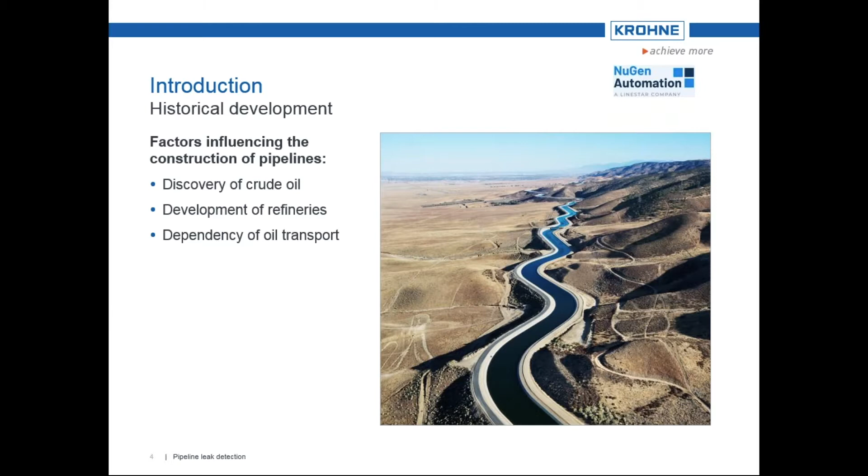Today's pipelines originated in the second half of the 19th century. While drilling for water, crude oil was accidentally discovered in underground reservoirs. This crude oil was not very popular until simple refineries came into existence. The oil was transported to these refineries in wooden vats that were originally transported across rivers via barges, even pulled by horses. One alternative method of transport was by way of railway tanker cars.

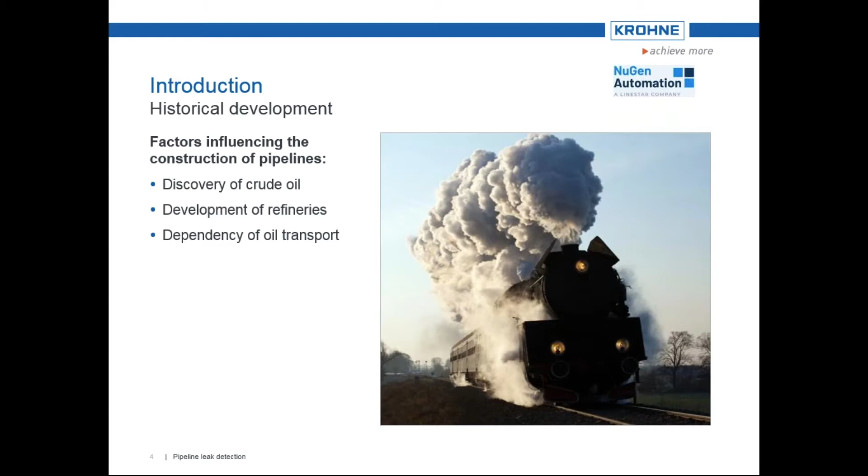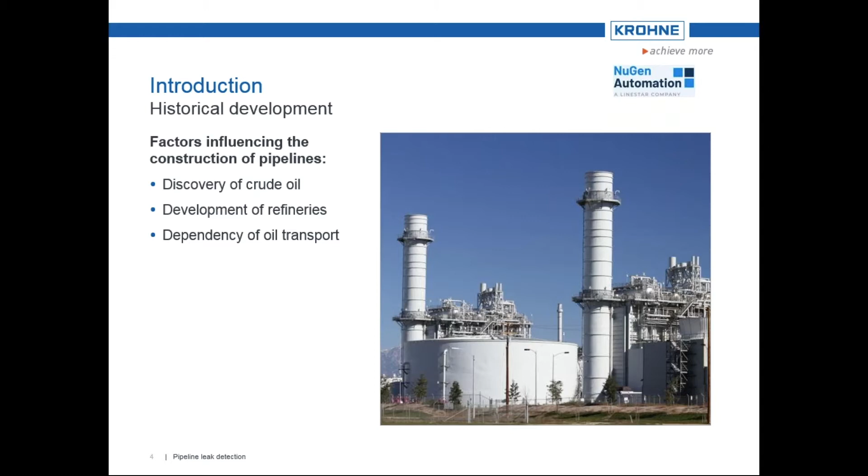However, this meant that the oil was controlled by the railway owners. These were very large monopolies at the time. So to make transport independent and more reasonably priced, pipelines were adopted as a more economical means of transportation. The transported oil was then boiled off in refineries to obtain the byproducts of naphtha, petroleum, heavy crude oil, coal tar, and benzene. The petroleum was used as fuel for lighting and was very popular, and the benzene produced at that time was initially considered an unwanted byproduct and was disposed of.

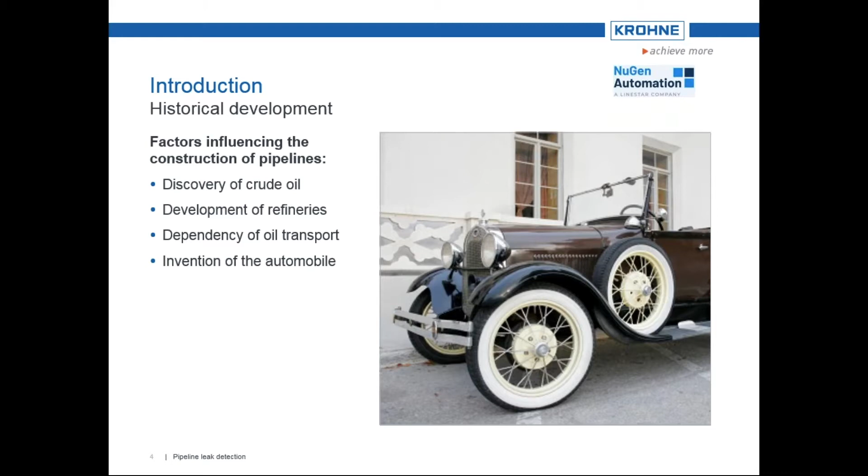This situation changed drastically with the invention of the automobile, which drastically increased the use of gasoline or benzene. Pipelines today transport a wide variety of materials, including oils, crude oils, refined products, natural gases, condensates, processed gases, as well as fresh, produced, and salt waters. Today, there's some 1.2 million miles of transport pipelines around the world, some well over 1,000 miles in length. The total length of all these pipelines lined up end to end would circle the Earth 50 times over.

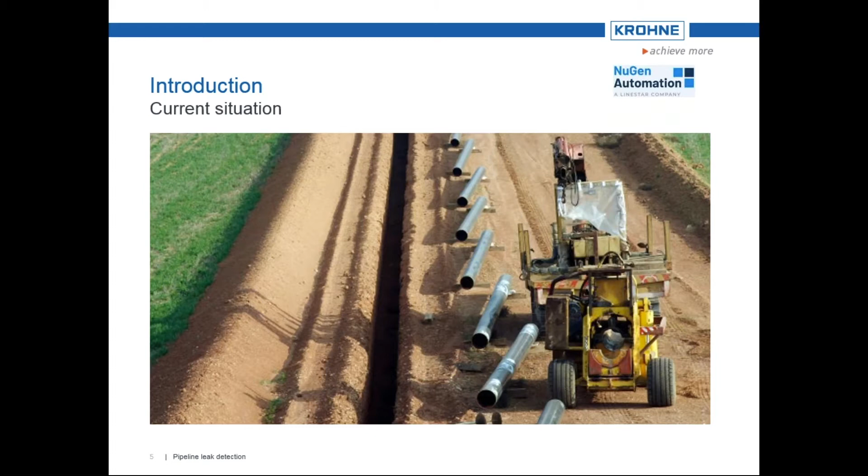The construction of longer pipelines with larger diameters also increases the need for more intelligent leak detection systems to better detect and localize any unwanted releases. Whereas it was once enough to have inspectors walk the length of pipelines and visually look for leaks, today this is no longer possible. In many cases, due to the longer lengths and rigorous runs of remotely located pipelines, physical access may be limited. Pipelines can run through snowy landscapes, across mountain ranges, along bodies of water, or even be located underground at depths of up to or exceeding 1 mile.

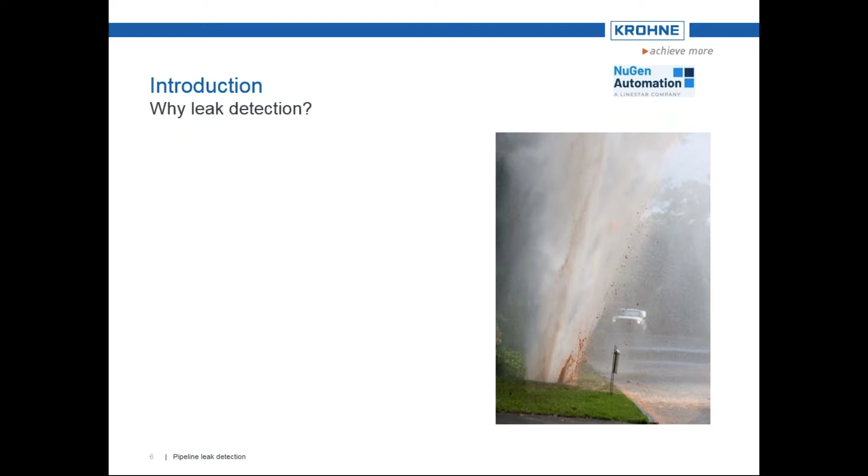But why is it necessary to implement leak detection systems at all? Although pipelines are the most reliable and safe option compared to other methods of transportation, accidents and thefts can and do occur with pipelines. In such cases, leak detection systems can help minimize the damage to people, to the environment, and the company image, which is significant these days, as well as the high cost for repair, renovation, indemnity, breakdowns, and of course the lost value of the liquid or gas that has been released. And again, in most cases that's least significant in the case of an accidental leak.

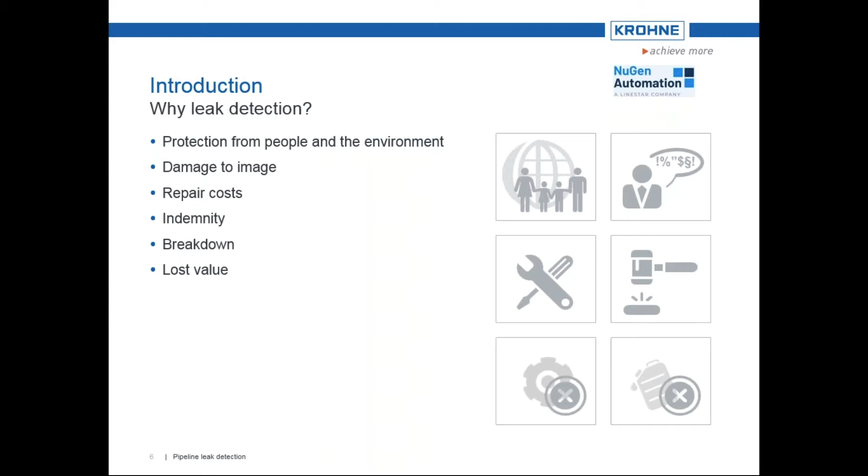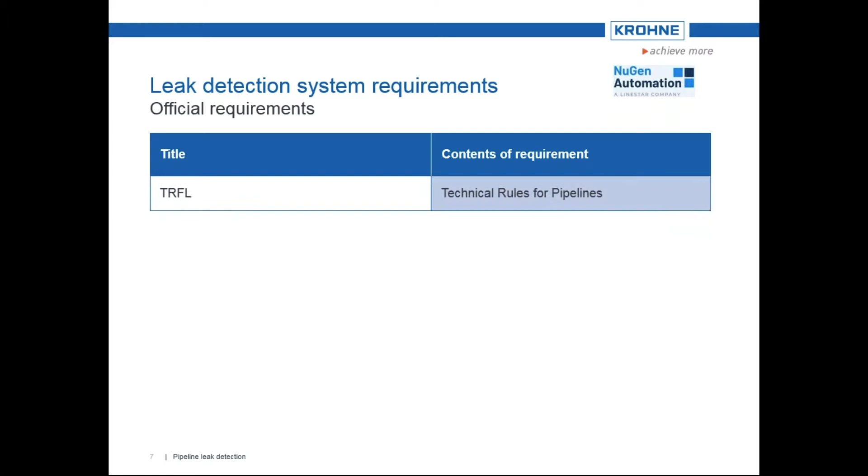In addition, there are also different official regulations related to pipeline leak detection. Let's have a look at those. In many countries, it has become necessary to observe official requirements in order to ensure safety of pipelines, particularly for hazardous materials. These requirements include the German TRFL, loosely translated Technical Rules for Pipelines. In the US, it's API 1130, which deals with computational pipeline monitoring for liquids. API 1149, which deals with the variable uncertainty of pipelines and their effects on a leak detection system.

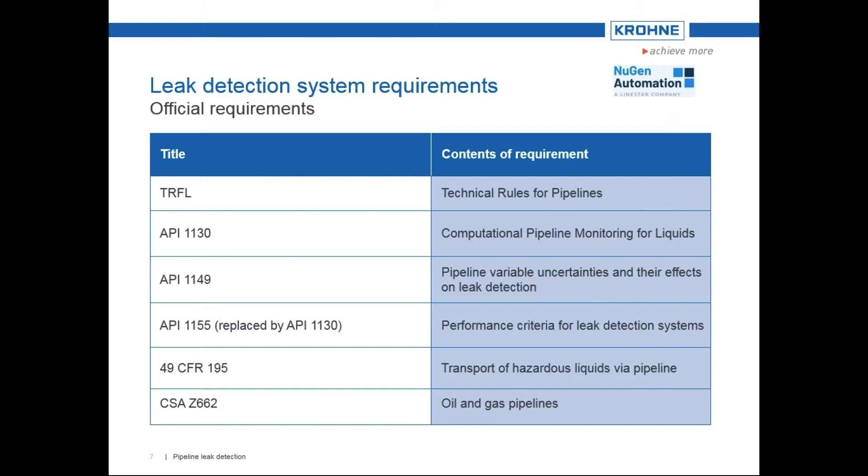The former API 1155, which contains performance criteria for leak detection systems. This has since been rolled into and included in API 1130. And the American 49 Code of Federal Regulations, 49 CFR 195, which regulates the transport of hazardous liquids via pipeline. Up in Canada, it's the Canadian CSA Z662 that regulates oil and gas pipelines. But regardless of the specific national regulations, these rules are observed internationally and often form the basis for the selection of a suitable leak detection system.

As we've just shown, leak detection systems are subject to official regulations. Leak detection systems must be sensitive, reliable, accurate, and robust. Sensitivity is a combined measurement which takes into account the minimum detectable leak rate, as well as the time it takes until a leak is detected. Here it is best to indicate the total leaked volume that escapes until the leak is detected. Reliability means that false alarms are avoided, but the actual leak events are reliably detected. Accuracy refers primarily to the localization of leaks. For example, leak location information is indicated in units of length, and accuracy information in percent of the entire length or pipe segment or instrumented segment.

Robustness refers to the operation of the pipeline leak detection system under less than ideal operating conditions. This includes things like sensor failure.

In this event, pardon me, I'm having to scroll to two screens.

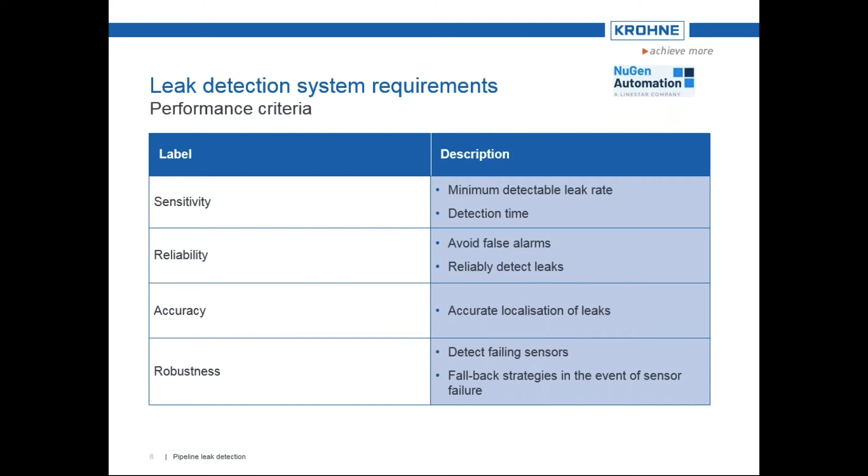This includes things like sensor failures, particularly flow, pressure, or temperature. In this case, the leak detection should be able to detect the failure and at least continue to work, albeit with reduced sensitivity. When evaluating individual leak detection systems, you should weigh each of these individual criteria against one another and not decide based on a single specification. And it's important to note that you can't just give a specification. It's, in most cases, very determinant on the actual pipeline conditions, the operations, the layout, so very specific to the site.

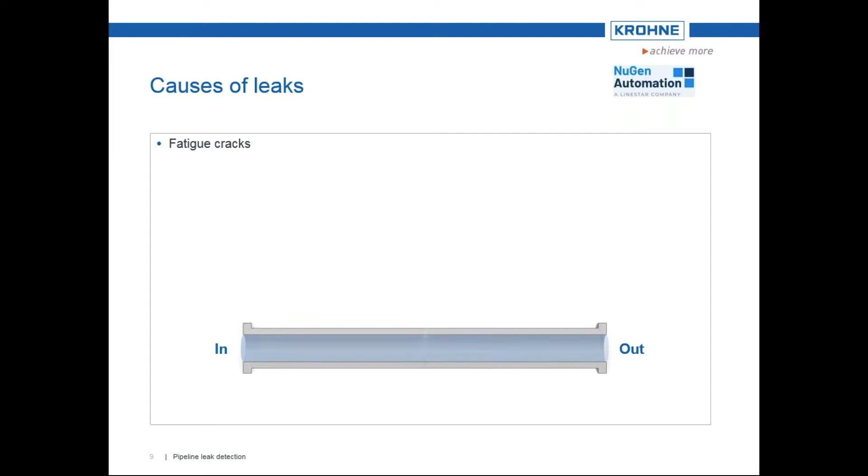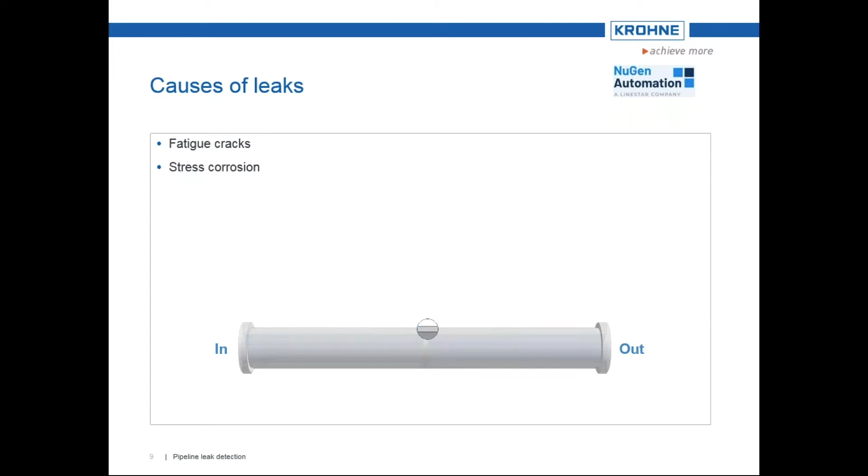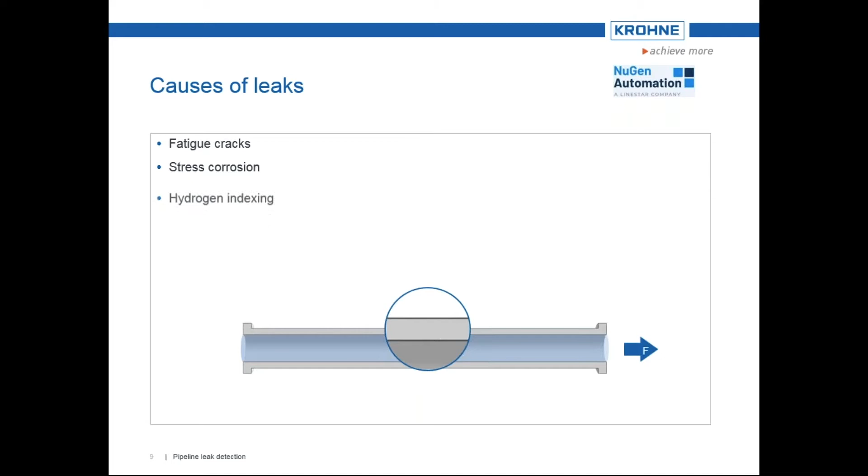Before we take a look at how leak detection in pipelines can be done, let's take a look at what causes leaks. Fatigue cracks are one cause. These occur as a result of material fatigue and are often found along longitudinal welds. Tensile stress can cause stress tears, which can reduce the effectiveness of cathodic corrosion protection systems, resulting in corrosion on the pipeline. Of course, stress corrosion is another issue. Cracks can also be caused by hydrogen indexing. In this, atomic hydrogen diffuses into the metal grid, forming molecular hydrogen. This can lead to pipe material embrittlement and being prone to early failure.

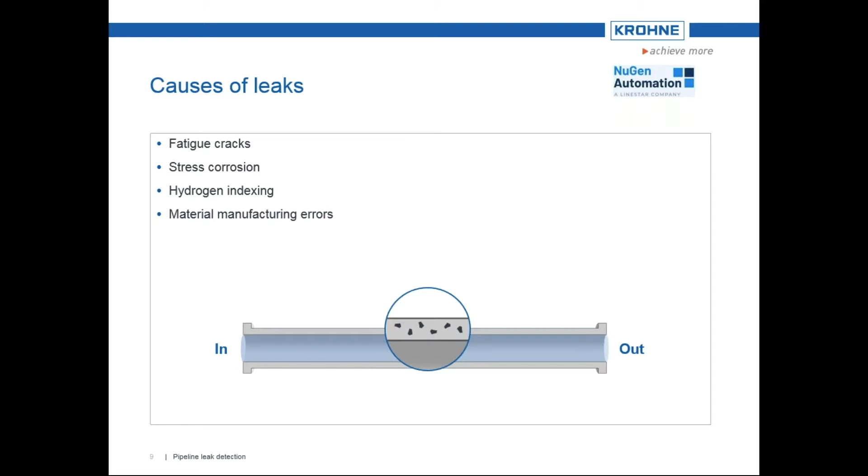Material manufacturing errors can also cause leaks, for example, when cavities have been rolled into the material during production of the pipe. And leaks can also occur when an external force acts from the outside. This is the case when, for example, a backhoe digs up a pipeline or a seismic event causes ground movements, causing shifts in the ground and breaking the pipeline.

Leak detection systems would be categorized into two major types. There's either continuous or non-continuous methodologies or systems. The non-continuous system includes inspection by helicopter or fixed wing airplane, smart pigging, and tracking dogs, believe it or not. Continuous systems can in turn be divided into either external or internally based systems. External based systems include things like fiber optic, acoustic systems, semi-permeable sensor hoses, and even video monitoring. Internal systems are basically what API defines as computational pipeline monitors, or CPM. Internal systems include things like pressure point analysis, mass balance methods, statistical analysis, real-time transient model-based systems, and the latest evolution, the extended real-time transient model systems.

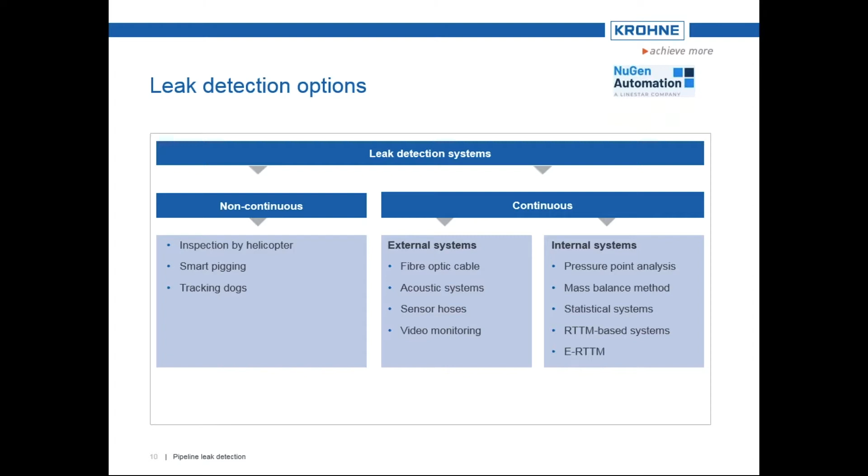In practice, non-continuous systems are often used in conjunction with continuous systems. In fact, I know in the US you're regulated to walk or fly your pipeline no longer than 3 weeks between inspections. As we saw in the overview of leak detection methods, inspection by helicopter is one option for detecting leaks. The helicopter flies along the pipeline looking to detect any outflowing gas.

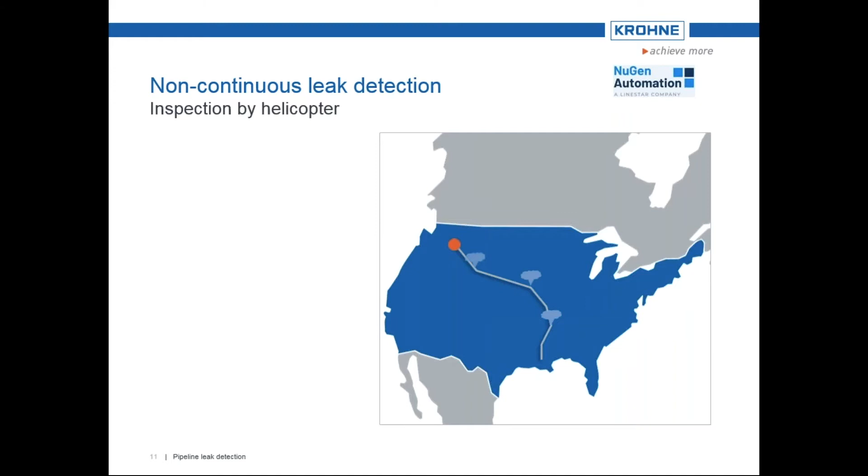Three common methods when detecting leaks by helicopter include detection using laser, infrared cameras, and leak sniffers. When using lasers for leak detection, a laser is set to the absorption wavelength of the medium to be detected. When the laser hits the medium, a part of the laser energy is absorbed. The amount of energy absorbed from the laser is measured to arrive at the amount of leaked medium.

Detecting leaks using infrared cameras functions by using video cameras that are fitted with a special filter that highlights a selected spectrum of infrared wavelengths. Certain hydrocarbons absorb infrared radiation from this spectrum, and leaks are detected as a visual indication, similar to smoke in the video image.

Leak sniffers draw in air. I'm sorry, I passed by that. Leak detection using, okay, I've covered that, I'm sorry. My apologies.

Leak sniffers actually draw in air samples to evaluate in an analyzing unit, directly measuring the concentration of any leaked medium. To do this, the helicopter, of course, must fly slow enough to pass through the gas cloud made by a leak. The analyzing unit then indicates whether gas is present and in what concentration.

Helicopters are a good option for detecting small gas leaks when the pipeline route is suitable for accurate flight routes. However, the accuracy also depends on the weather conditions. Poor weather conditions mean that the leaking gas can drift. In severe cases, the helicopters cannot even fly. So during extreme weather, monitoring using this methodology would not be possible.

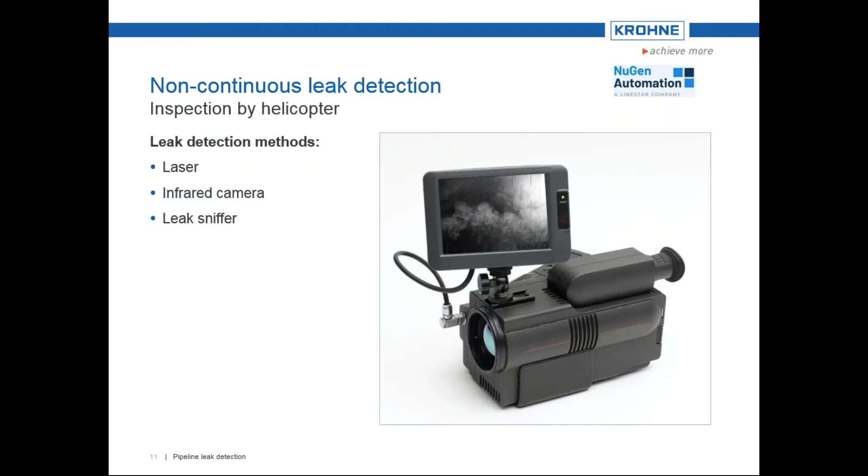And that's the image I skipped over, my apologies. And the sniffer unit.

Pipeline pigs are utilized for a variety of tasks in the pipeline integrity management field. This includes inspection, of course, of pipes and gauging, cleaning the pipelines. They use separating pigs for product batches, as well as gauging, as I mentioned. It can help gain valuable information about corrosion, cracks, wall thickness, as well as existing leaks in the pipeline. In this case, we use the term smart pigging.

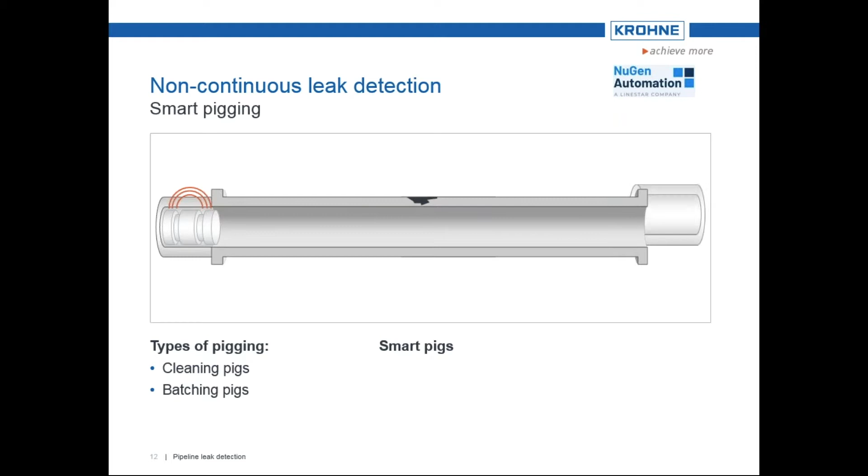To perform pigging, a pig is inserted into the pipeline using a pig launcher. The pig advances through the pipeline, propelled by the medium, and gathers data along the way. A receiver is used to guide the pig out of the pipeline in order to subsequently collect and analyze the data. Various techniques are used to collect pipeline information using smart pigs. Two of these are the magnetic flux leakage method and the ultrasonic principle.

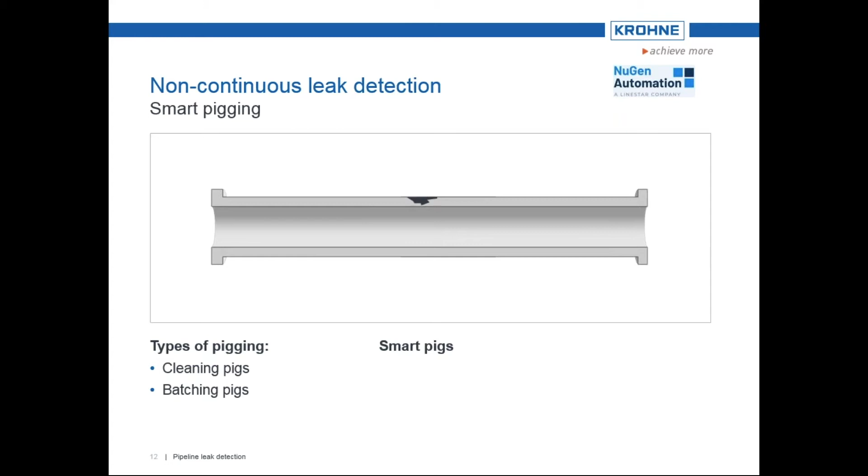With the magnetic flux leakage method, a strong permanent magnet is used to magnetize the pipeline. Any changes to the wall of the pipe, such as corrosion, change the magnetic flux lines, which are then recorded by sensing probes attached to the pig. Following pigging, the recorded signals are evaluated based on reference signals to detect any defects or abnormalities in the pipe wall.

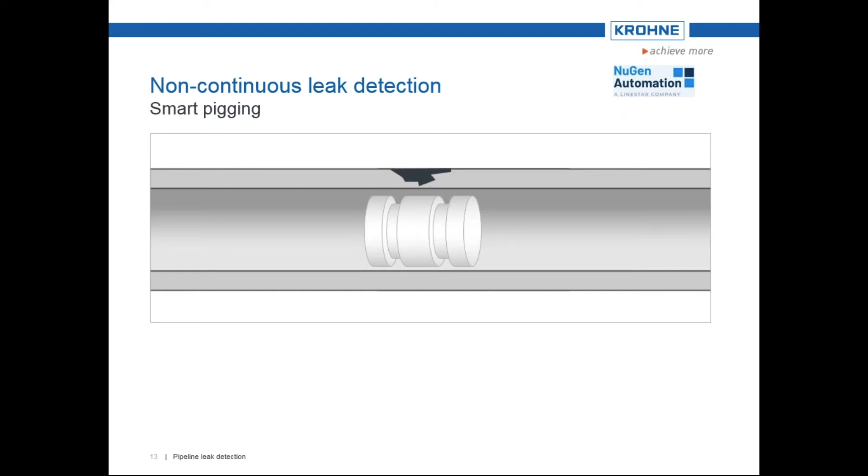When it comes to the method based on ultrasonic principle, the pig transmits ultrasonic pulses into the line and receives their reflected signals. The signals are reflected by the inner and outer wall, and based on the running time of the signals, the thickness of the pipe wall can be derived. By using smart pigs, existing leaks can be detected as well as damage to the pipeline, which could result in leaks. Pigs fitted with acoustic sensors can listen for a leak, for instance.

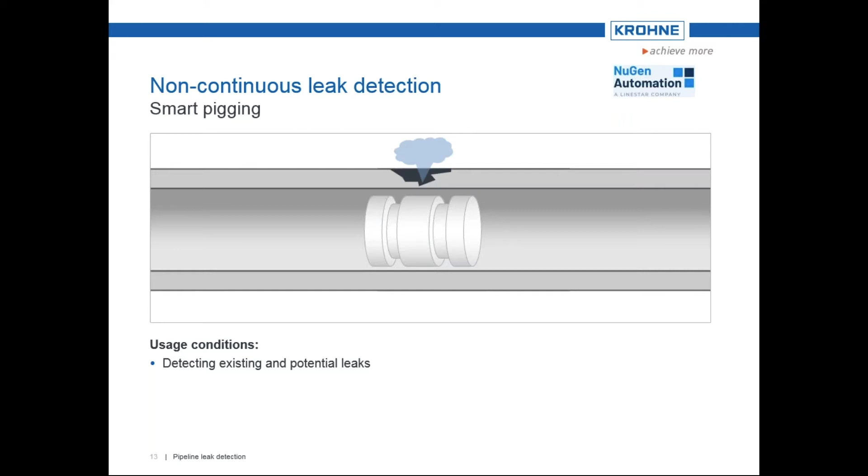Prior to commissioning pipelines, they are often pigged, and the results are used as a baseline for further inspections. This is called zero or baseline pigging. It is important to ensure that the pipeline is piggable in the first place. This means that you must be certain that there are no obstacles in the pipeline, such as restrictions or fittings, making the passage too narrow, and that there are pig launchers and pig receivers to capture the pig.

In addition, the speed of the pig must be kept between 3 to 15 feet per second to obtain accurate results. That's quite easy in liquids. That's normal flow velocities. However, that can be a challenge in gas pipelines. That is a fraction of what their typical velocity would be.

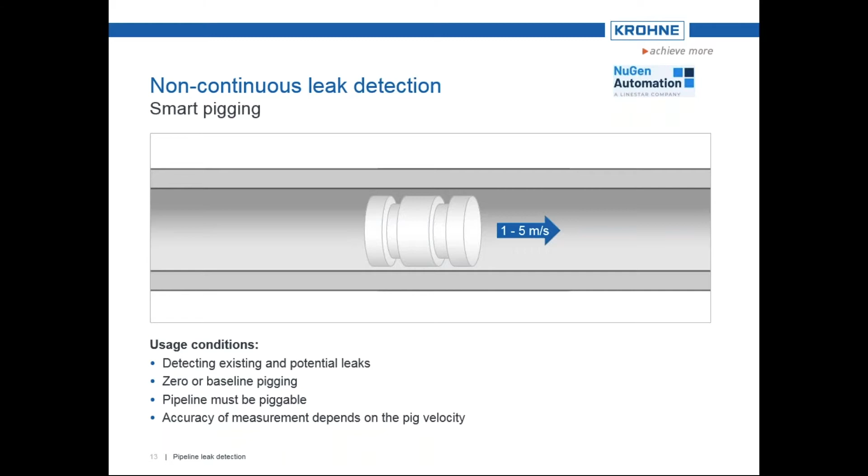Another non-continuous solution for monitoring for leaks is the usage of tracking dogs. These dogs are specially trained to recognize the odor of a certain compound. This compound is injected into the pipeline to be inspected. The pipeline is then operated as usual, and the dog is led along the path sniffing for this compound. Very precise sensor, our dog nose.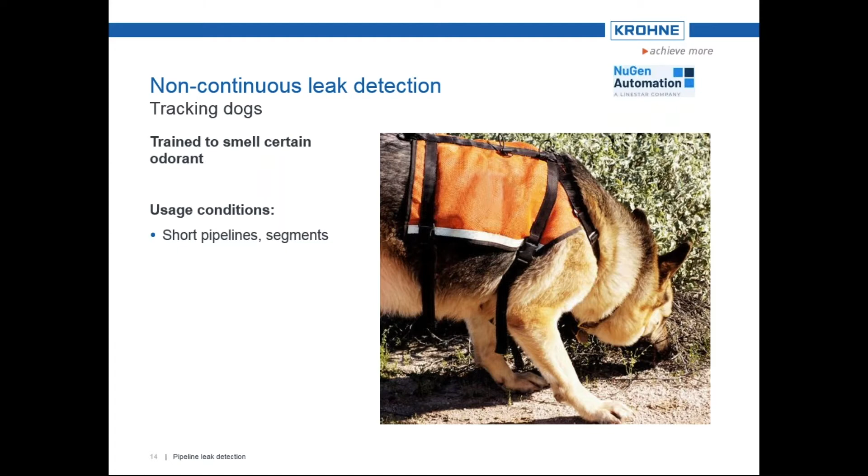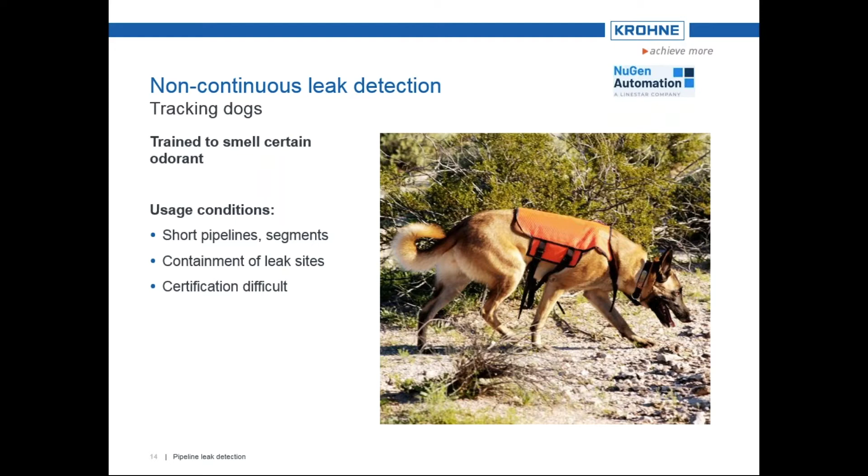The use of tracking dogs usually takes place with short pipelines or segments of pipeline. It's also a good method when it is not possible to accurately locate a leak using other methods, and then the dogs can be used to further narrow down the leak site. However, it is difficult to certify a tracking dog as a certified or regulated leak detection system, particularly within the framework of something like API or TRFL.

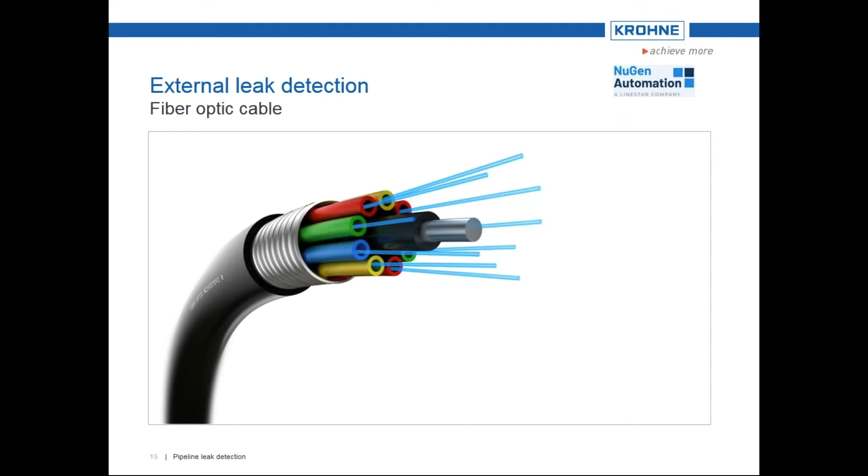The use of fiber optic cables for the continuous external monitoring of leaks is based on physical changes that occur at the leak site. One of those physical changes is a typical change in the temperature profile, particularly with gases, not so much in liquids, but with gases for sure, due to the Joule-Thomson effect.

To detect such leakage, the fiber optic cable is placed along the pipeline. A laser then emits pulses that are reflected by molecules in the glass. The reflected laser pulse magnitude gives insight as to the temperature at the place where the photon hits the molecule. By adding these reflections, a temperature profile can be made, and it is then possible to detect the characteristic change in temperature that would occur at the site of a gas leak due to that rapid cooling or Joule-Thomson effect.

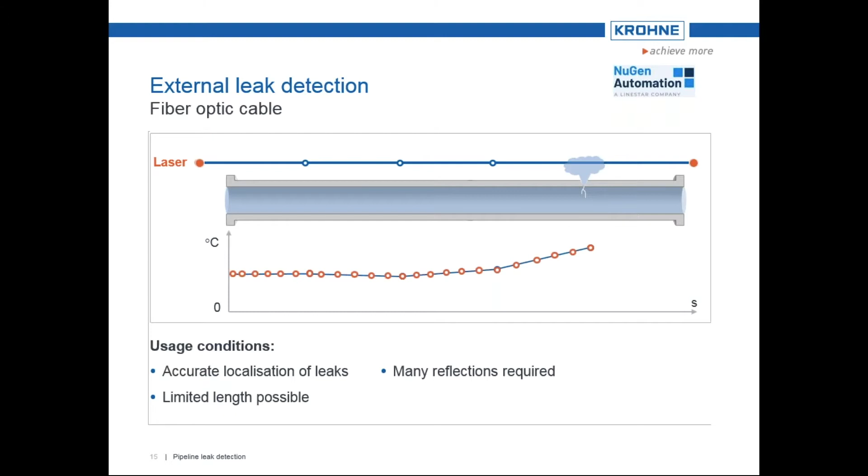Monitoring pipelines with fiber optic cables is a good option for accurately localizing leaks. However, use of this method is only possible up to limited lengths of pipeline, and many reflections are required to plot a useful temperature profile, so it's very data intensive. When installing the cable, it is also necessary to pay attention to the medium to be monitored. If it is a gas to be monitored, the cable, of course, should be installed above the pipeline as gas normally rises. When it comes to liquids, it makes sense to install the cable below the pipeline as liquids would tend to sink.

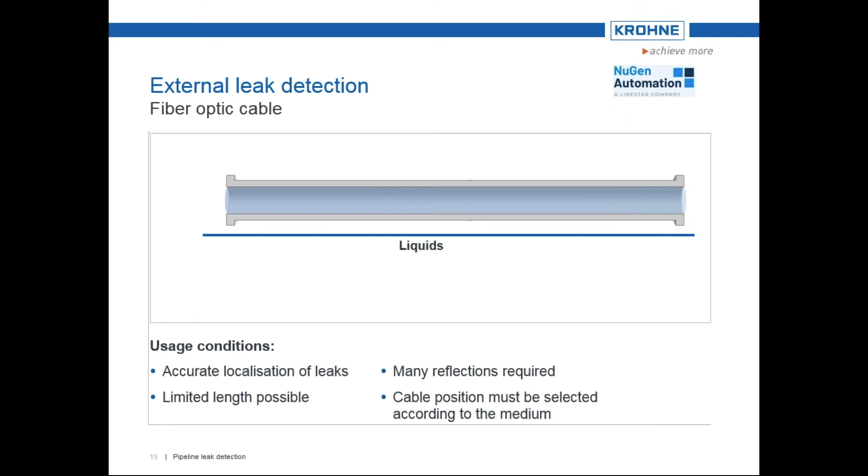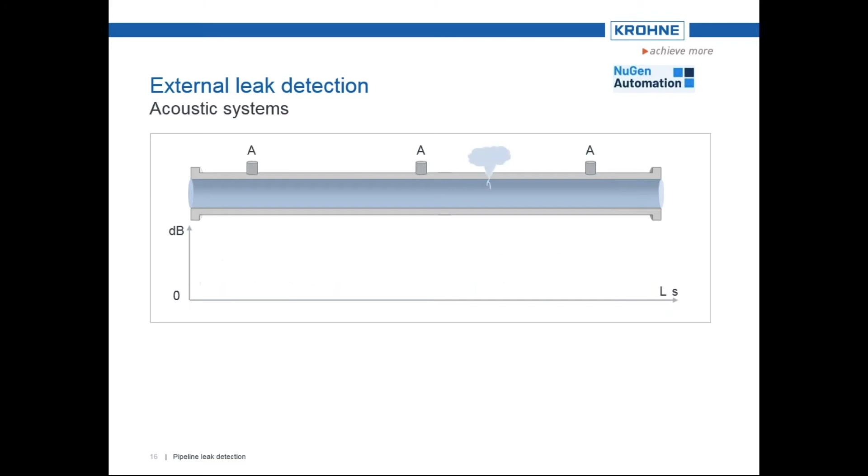Detecting leaks using acoustic signals is possible because an acoustic signal is created when gases or liquids flow through a crack or hole in the pipeline. Acoustic sensors are installed outside of the pipeline to detect leaks by measuring the acoustic noise levels, typically at multiple sites along the pipeline. This information is used to create a noise profile of the pipeline. Deviations from the baseline noise profile result in a leak alarm going off.

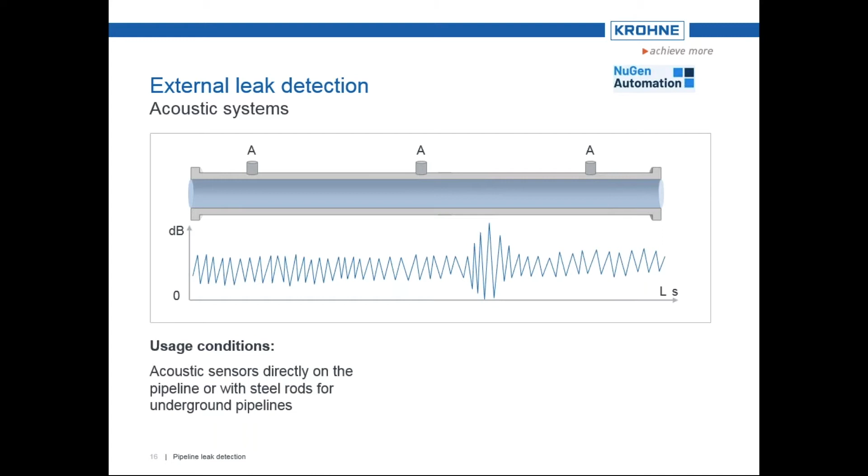Acoustic sensors can be mounted directly on the pipeline, or they can be coupled to the pipe wall using steel rods for underground pipelines. To monitor longer pipelines, a large number of acoustic sensors are needed. Small leaks whose acoustic signals are small and only differ slightly from the background noise cannot be detected, as otherwise there would be many false alarms. And of course, noisy areas with heavy traffic, for instance, truck traffic, could create high background noise.

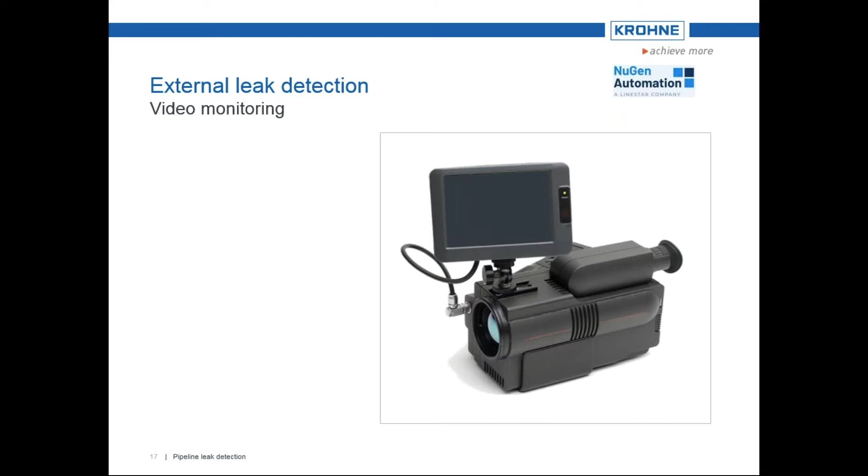Detecting gases using infrared is possible through video cameras featuring special filters, which are sensitive to a selected spectrum of infrared wavelengths. Certain hydrocarbons absorb infrared radiation from this spectrum. This makes it possible to detect the leaks as an image of smoke on the video display in the case of gases. Liquids can also be detected using infrared cameras, as the thermal conductivity in wet ground is different than dry ground. In this case, you get a different temperature pattern above the leak position.

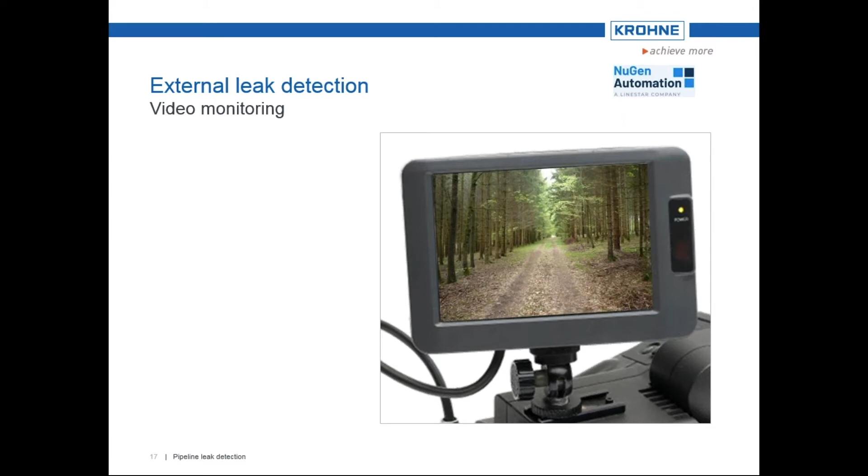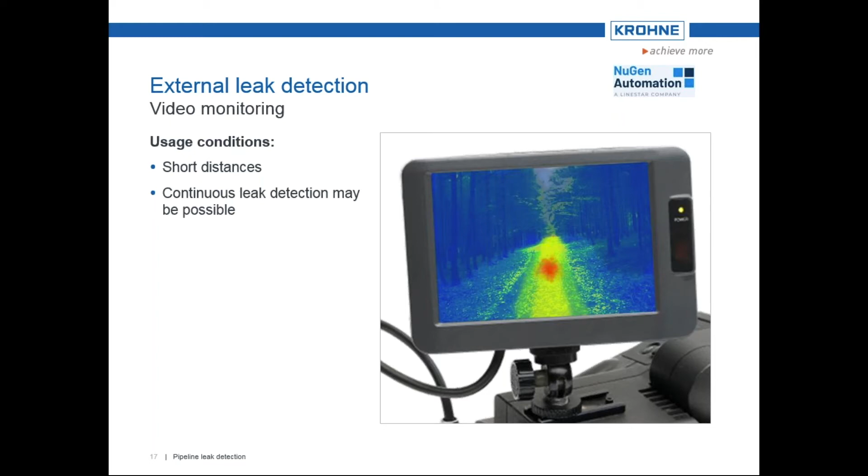Video monitoring of pipelines is designed for short distances or on company property. It is thus an interesting option in critical areas such as on company premises or high consequence areas. For its use as a continuous leak detection method, however, it's important to note whether leak detection would occur automatically, or it would have to be manned and somebody actually visually see it and alert. So whether the system has the capability to declare a leak or not.

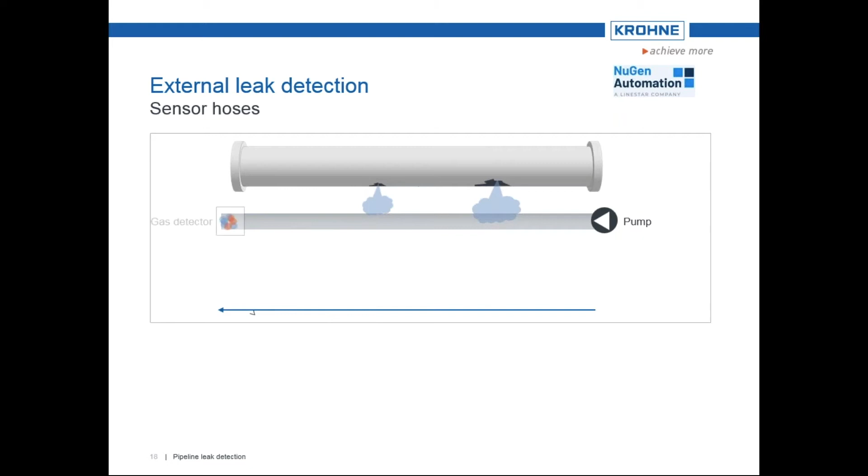Sensor hoses are really typically used on chemical plants in very toxic environments. Here a sensor hose, a semi-permeable hose, is installed along the pipeline. In the event of a leak, the medium comes out of the pipeline and into the hose. In a time cycle, a test gas is injected into the hose and pumped through it. Then the contents of the hose are pumped to the end of the pipeline. There is an analyzing unit at the end, which then tests the hose contents for the presence of the particular hydrocarbon or toxic gas or liquid. The runtime of the test gas indicates the total runtime or length of the pipeline.

As the total runtime is known, the difference between the arrival time of the medium signal and the length of the pipeline can be used to derive the leak site. Due to the material-specific properties of the hose, the use of sensor hoses usually only takes place in very short pipelines. The analyzing units can detect very small volumes of substances, meaning even the very smallest of leaks can be detected. Just as with fiber optic cables, when installing the sensor hose, pay attention to the positioning of the hose, either above or below the pipeline.

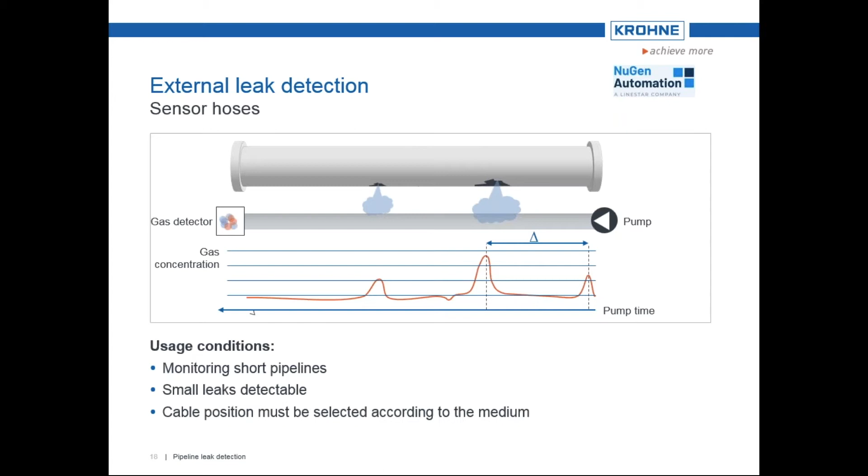Before we look at the individual methods of internal continuous leak detection, let's first look at the basic functioning of these systems. When there's a leak, the pressure and flow patterns in a pipeline change. These changes are recorded by the instrumentation, and the SCADA system transmits them to the control room. The system then calculates whether there is a leak in the pipeline, and the operator is informed at the HMI of the current status.

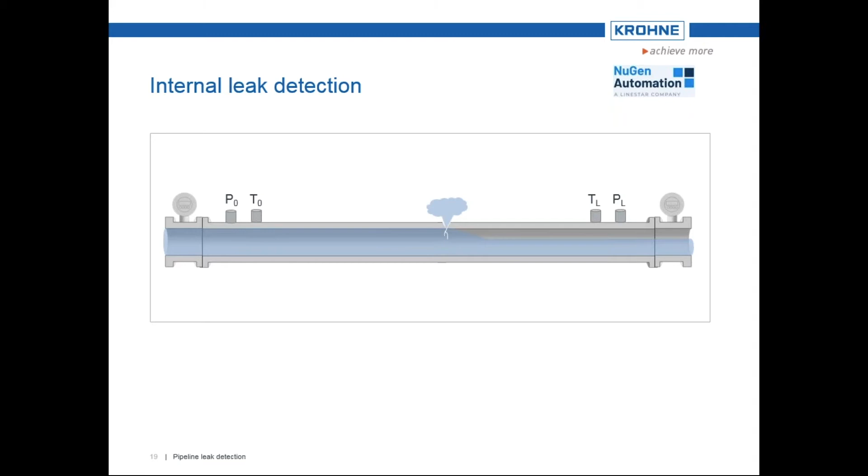Continuous internal systems are based on the following principles: pressure point analysis, mass balance, statistical, and real-time transient model, and the newest extended real-time transient-based model systems.

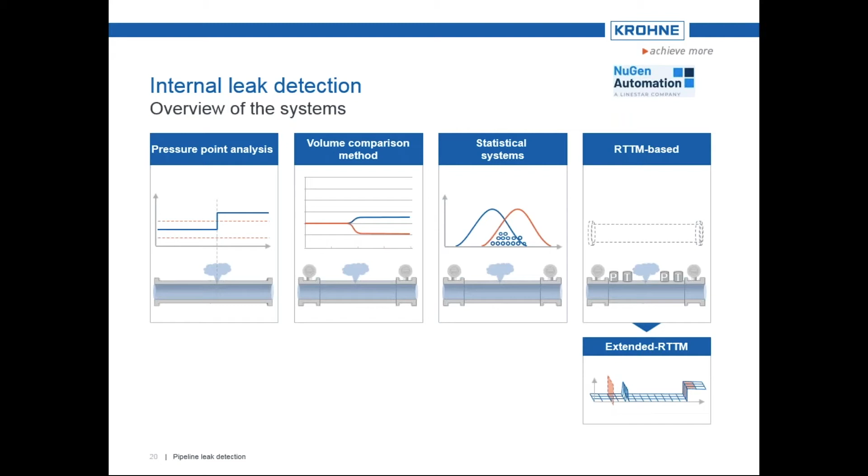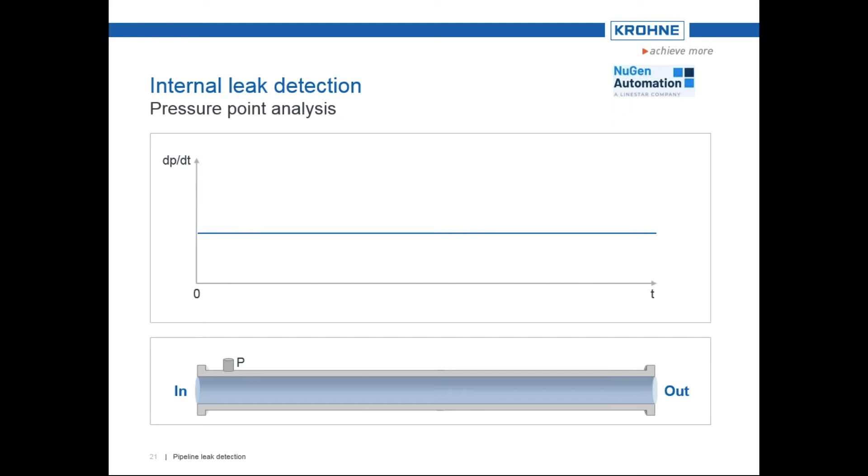Pressure point analysis is based on the evaluation of pressure drop or the pressure profile measured at individual points. As a spontaneous leak brings up a characteristic negative pressure wave, you can check whether the measured pressure drop dP within a time period dt exceeds set thresholds. In addition, a lower threshold for the absolute pressure is determined, and if either one of these events occurs, the system triggers an alarm.

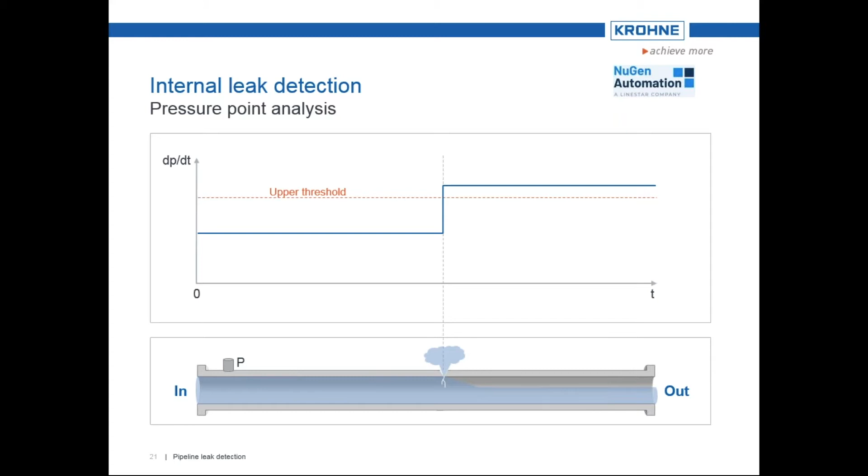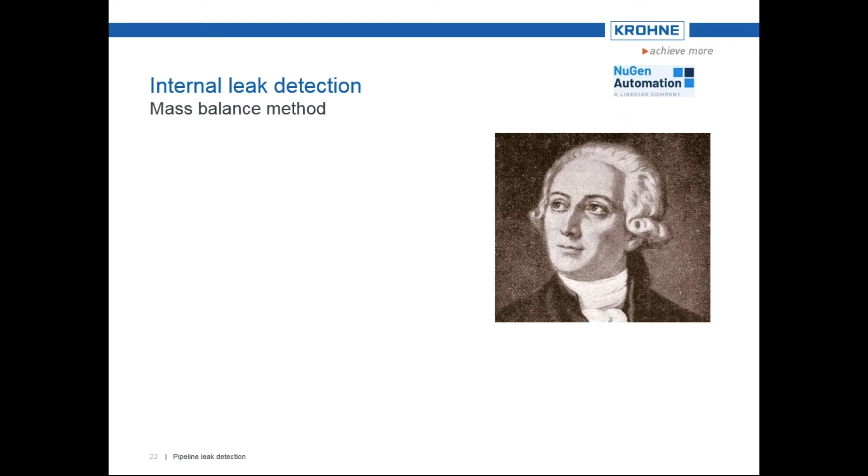Another type of internal leak detection system is based on Antoine Lavoisier's conservation of mass principle. According to this principle, mass in a closed system, which we hope our pipelines are, remains constant and is not changed by processes within the system. If the pipeline is considered to be a closed system and you compare the mass flow at the inlet and the mass flow at the outlet, the difference in those mass flows in a leak-free case should always be zero.

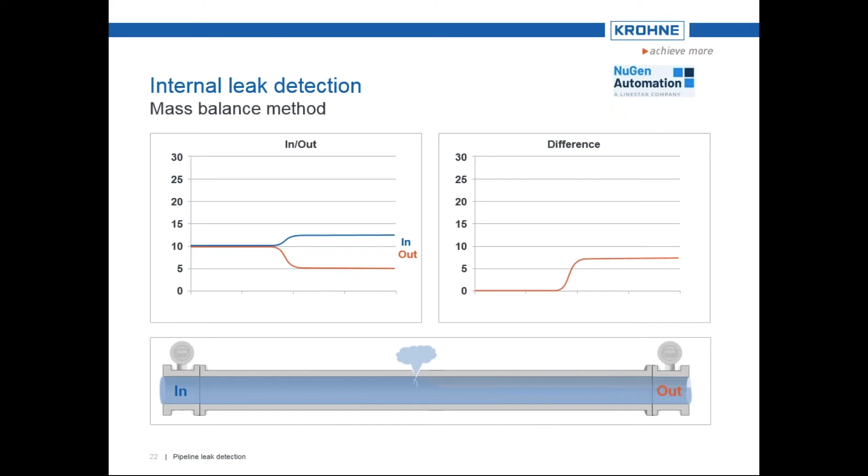If, however, a leak occurs, the system has been opened and mass escapes. This results in a decrease in the measured mass flow at the outlet and an increase in the mass flow at the inlet. The problem with this type of leak detection is that it does not take into account dynamic changes in the content of the pipe, often referred to as line pack. This can happen, for example, when more product is being produced for a gas pipeline than is currently being consumed, with the pipeline pack serving as a large tank or cache. This type of leak detection is thus also known as uncompensated mass balance.

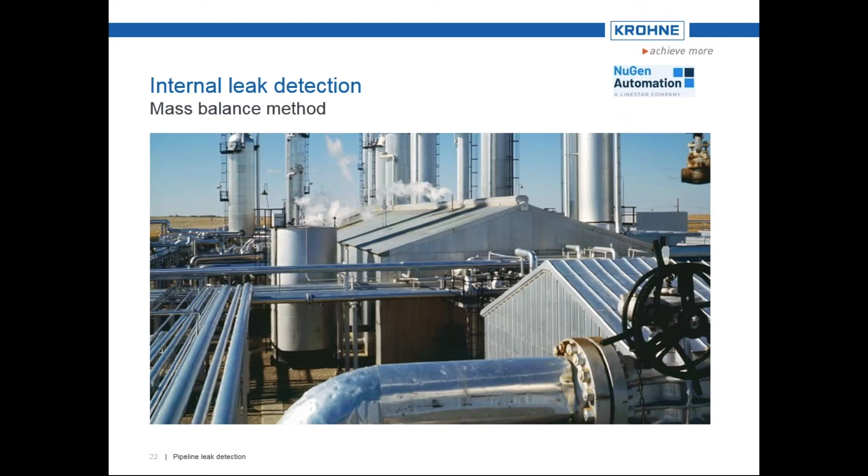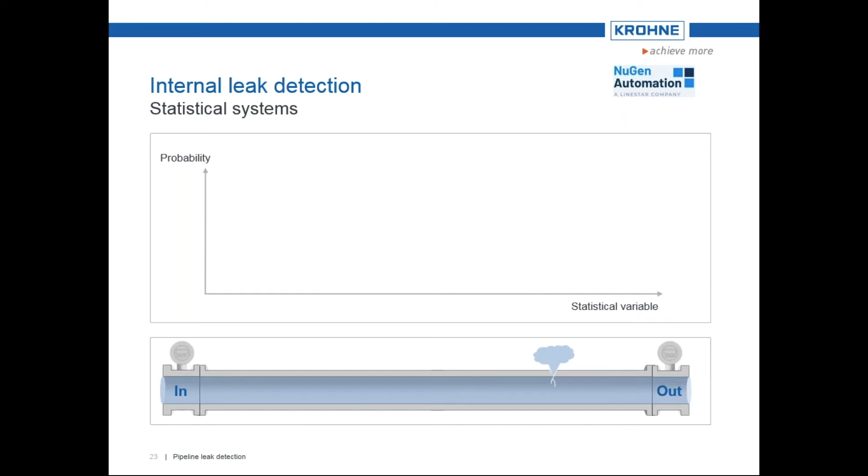Statistical leak detection systems subject a previously determined variable to a statistical test. Common statistical variables include pressure change over time or the result of a mass balance. The so-called hypothesis test is widely used here. With this test, two hypotheses are prepared, namely hypothesis 0, a no leak condition, and hypothesis 1, a leaking condition. The system checks whether there is enough data for a statistical variable to be a plausible part of the leak hypothesis, and if it is, sends out an alarm.

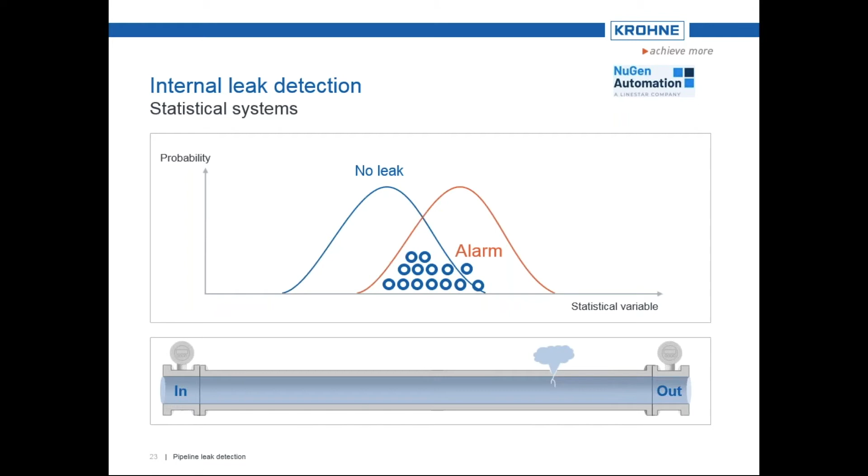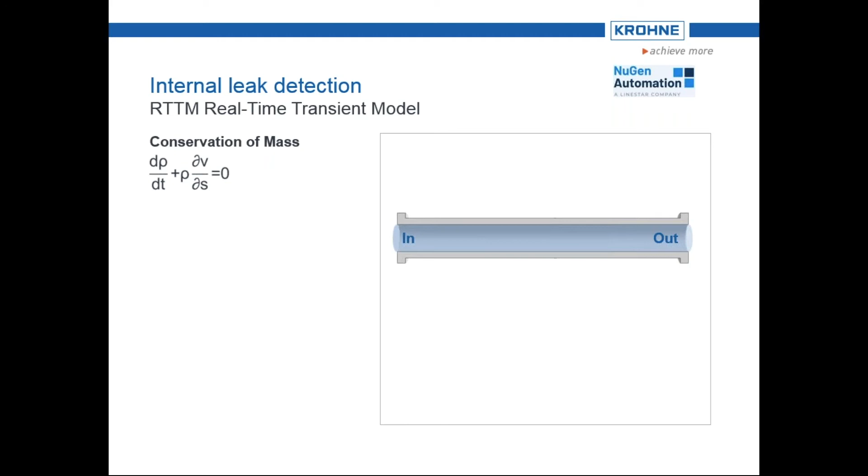Real-time transient models, or RTTM systems, can compensate for dynamic changes. To do this, they make use of basic physical laws which the pipeline must obey. The conservation of mass principle, which includes the density rho, the time t, the flow velocity v, and the pipeline location coordinates s. The conservation of momentum principle, which includes the flow velocity, the time, the pressure p, the pipeline location coordinates, and the pipeline friction factor, Fs.

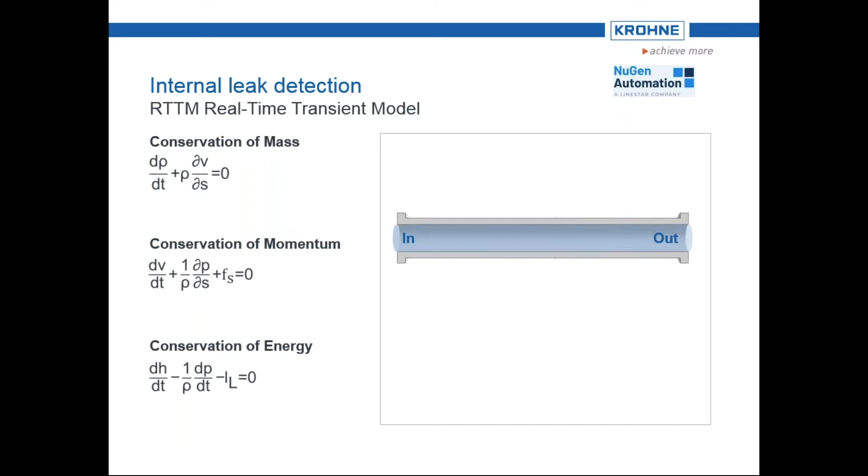And lastly, the conservation of energy principle, which includes the enthalpy H, the time, the density, the pressure, and the specific loss performance. These physical principles precisely describe the stationary as well as transient behavior of the flow in the pipeline. Using these equations, flow, pressure, temperature, and density can be calculated and integrated in real time for each point along the pipeline. These trends are also known as hydraulic profiles and accurately predict the true performance along the entire pipeline.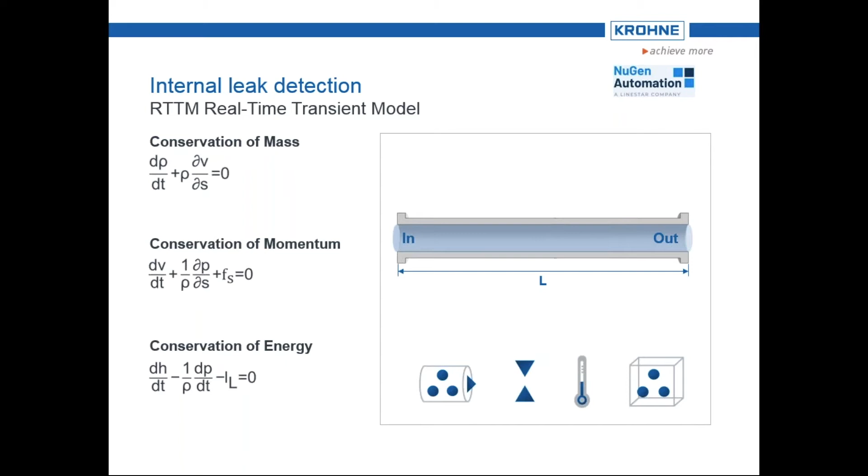But how do we actually detect leaks? To answer that question, let's take a closer look at the individual measurements. At the inlet, the pressure P0 and the temperature T0 are measured, and at the outlet, the pressure PL and the temperature TL are measured. Using these measurements along with detailed knowledge of the pipeline geometry and the properties of the product being transported, the leak detection system calculates the actual change in pipe contents or line pack.

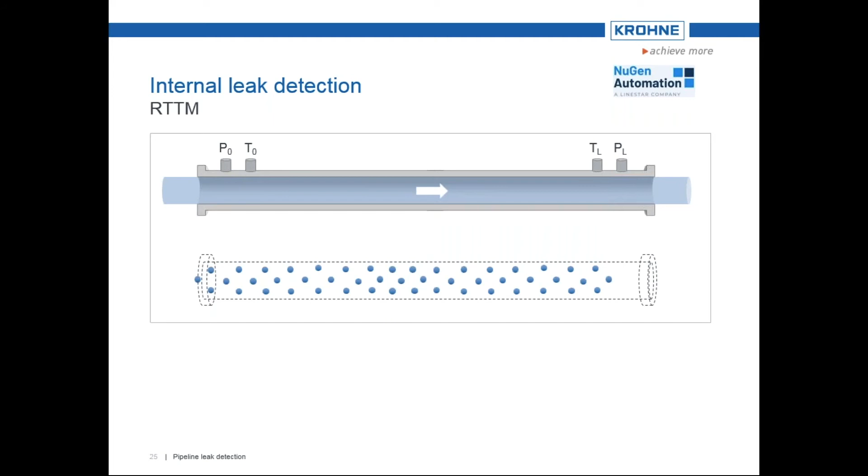This is subtracted from the difference between the measured flow values F0 at the inlet and FL at the outlet, and results in the current compensated leak rate of the system. We also talk about real-time transient model compensated mass balancing.

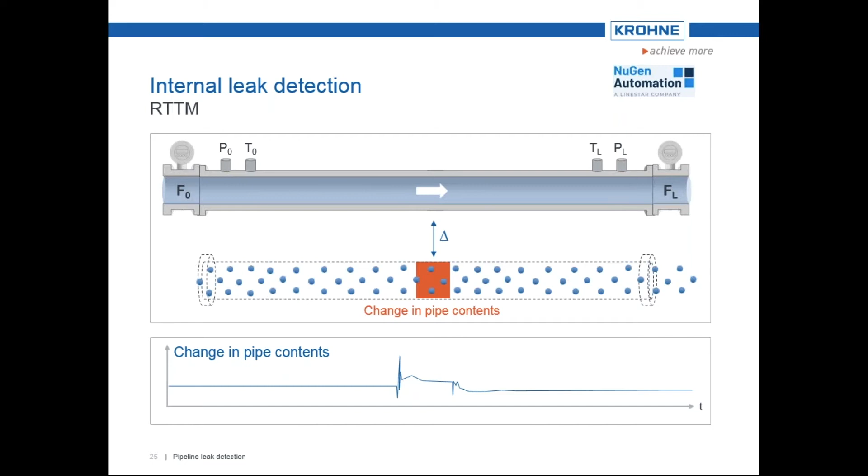Extended real-time transient modeling systems use the same principle as the real-time transient modeling systems. The pressure P0 and temperature T0 are measured at the inlet, and the pressure PL and temperature TL are measured at the outlet. Using these measurements, the leak detection system calculates, using the laws of physics, expected flow rates at the inlet and outlet. These expected values are then compared to the measured flow values, F0 at the inlet and

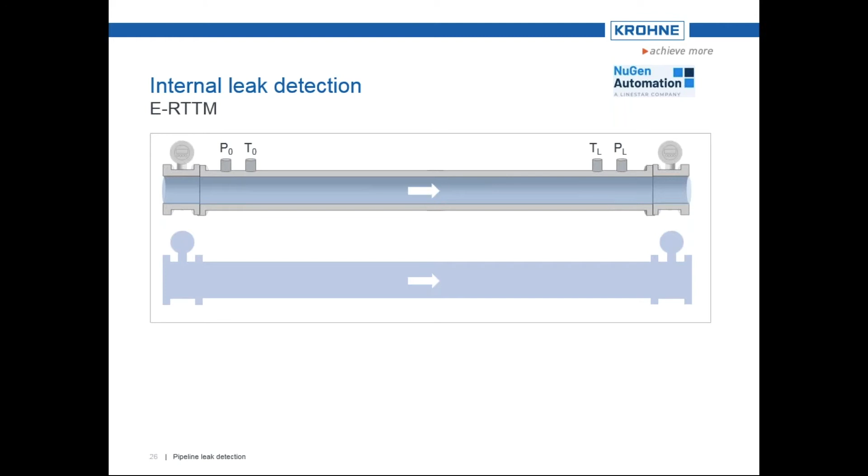FL at the outlet. Here we obtain the so-called residual values, where X equals the measured flow at the inlet minus the calculated flow at the inlet, and Y equals the measured flow at the outlet minus the calculated flow at the outlet. In a leak-free condition, both X and Y should equal 0.

In the event of a leak, we see deviations where residual X is greater than 0 and residual Y is less than 0. And that's due to the increased flow when a leak occurs due to less resistance in the pipeline on the inlet, and reduced flow on the outlet due to product escaping on the outlet.

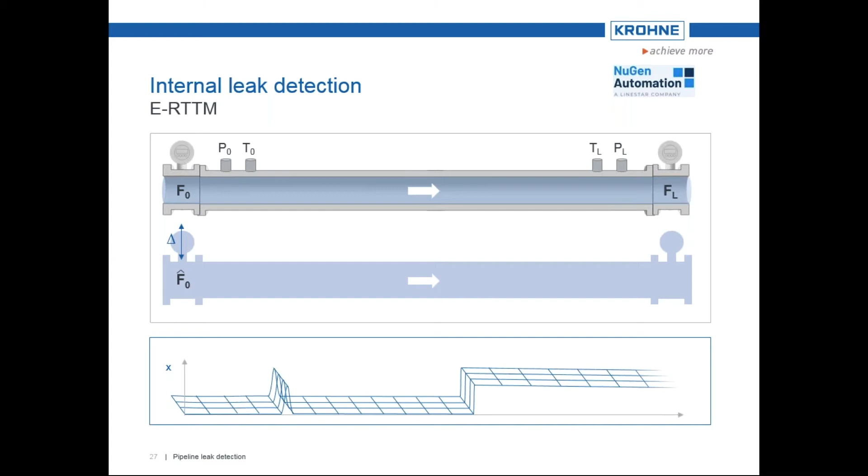In order to avoid false alarms, extended real-time transient model systems also use leak pattern recognition. This system uses the residuals X and Y as decision values, and a leak situation is not the immediate result of a deviation. Let's take a look at residual X. Leak pattern detection accesses an expandable database of different leak signatures and can thus differentiate between accidental interference, such as instrument drift or spike, and a true leak. Thanks to the special type of signal evaluation, small leaks can reliably be detected and false alarms avoided.

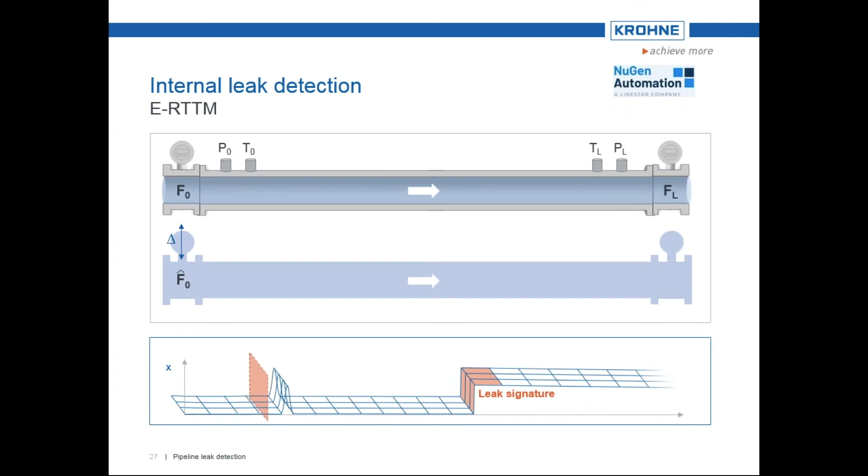Now that we know how the different internal leak detection systems function, let's take a look at their capabilities. Pressure point analysis shows a typical minimum detectable leak rate starting at around 5% of normal flow through the pipe. Detection time for liquid pipelines is short, but for gas pipelines it is long, and only spontaneously occurring leaks can be detected. So slowly developing leaks cannot be detected. The frequency of false alarms is relatively high. With additional pressure gauges, high accuracy when it comes to localizing leaks is possible, depending on the sensor sampling rate.

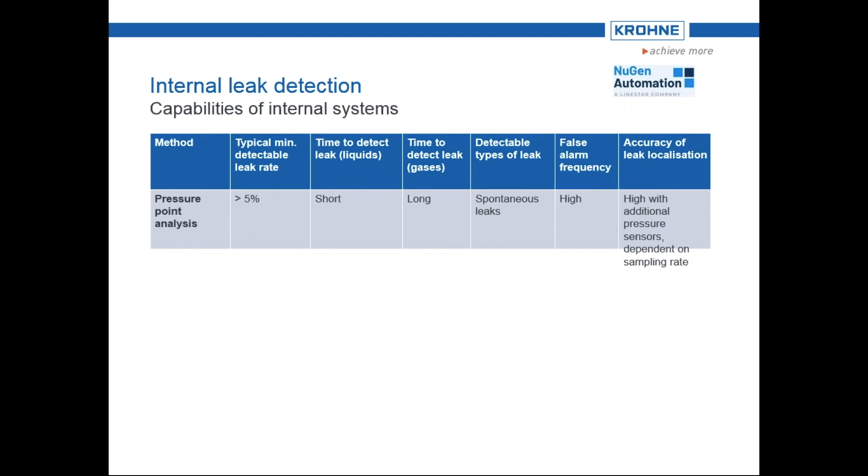Mass balance methods can typically detect leaks starting at 1% of normal flow in the pipe. The time needed to detect leaks for both liquids and gas is longer, but creeping leaks or slowly developing leaks can also be detected. The frequency of false alarms is high in this case as well. The accuracy with additional pressure gauges is average when it comes to leak localization.

Statistical methods generally detect leaks starting at about a 0.5% leak rate, but the detection times are longer. You need enough data to satisfy the statistical hypothesis. Both spontaneous and creeping leaks are detectable, and the frequency of false alarms is reduced with this statistical analysis. If additional pressure gauges are used, leak localization is fair in terms of performance.

And then real-time transient model-based systems detect both spontaneous and creeping leaks quickly. So the big change now is fast response to the leak due to the modeling. With a typical minimum leak rate starting at 1% of typical normal flows, the frequency of false alarms is average, and the accuracy in terms of localizing leaks is high.

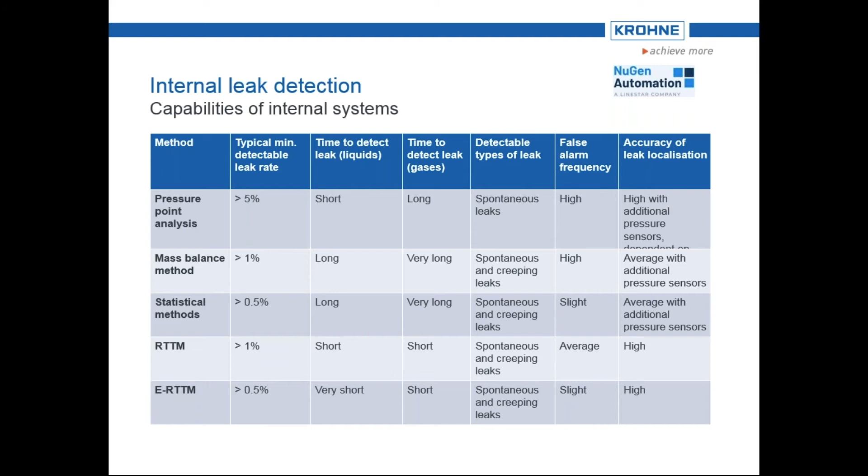The extended real-time transient systems can still detect leaks in liquid pipelines very quickly and in gas pipelines quickly, and start at a 0.5% leak rate, detecting both spontaneous and creeping leaks with high accuracy. And the frequency of false alarms now is drastically reduced by way of pattern recognition.

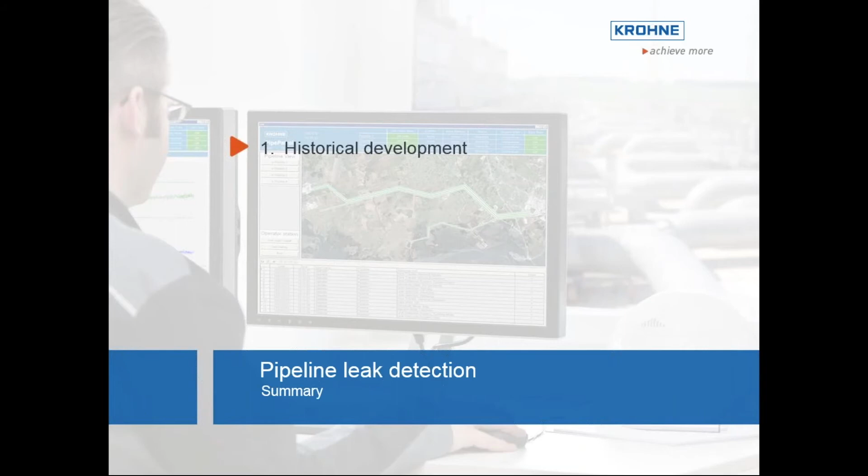Now that we've completed the leak detection session, you have a basic overview of the historical development of pipelines, and you know why pipelines are monitored for leaks. You know the requirements placed on leak detection systems. You're familiar with the various causes of leaks and different leak detection options. And you've also learned the basics of how non-continuous, continuous, external, and internal methods function.

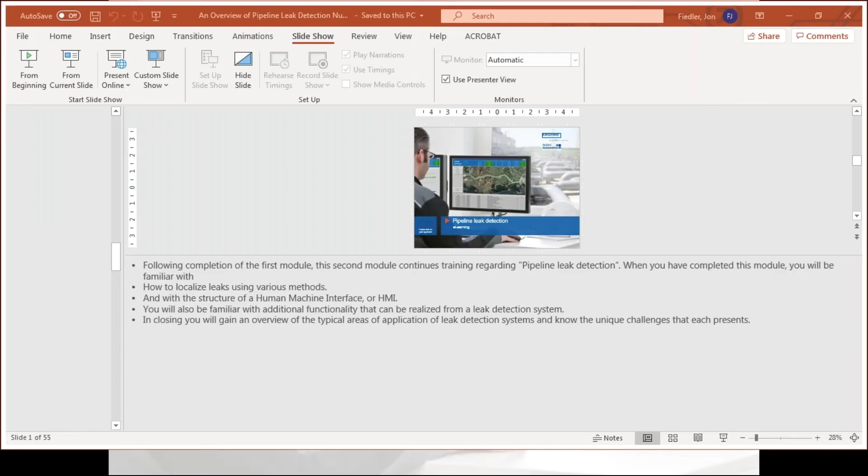Thanks, Jon. Very much appreciated. To everyone on the call, I know it was kind of a lot of detail to gather, but we did want to provide the various methods that are available, and then kind of finish out the full suite, going from internal, external, and ending up with the high fidelity model-based systems as well. So thanks, Jon, for that.

And again, just a little bit more background before we get to the Q&A, so you guys have asked some questions, but any more that get asked. Daniel heads up the pipeline solution management group for KROHNE, specifically responsible for PipePatrol, which is their premier leak detection suite. And then Jon is the ultrasonic flow meter product specialist with KROHNE, with a significant background, over 2 decades of work in this field.

So we had 4 questions asked previously, and then we've got a couple others asked here in the last hour or so. So Daniel, I'm going to throw the first one to you. Here's the question. Can you perform leak detection on a crude oil system without correcting flows to standard barrels? Okay, great. Thanks, David, for the question. Yeah, in principle, the answer is quite simple. So it's yes, we can. There are 2 reasons, or two possibilities.